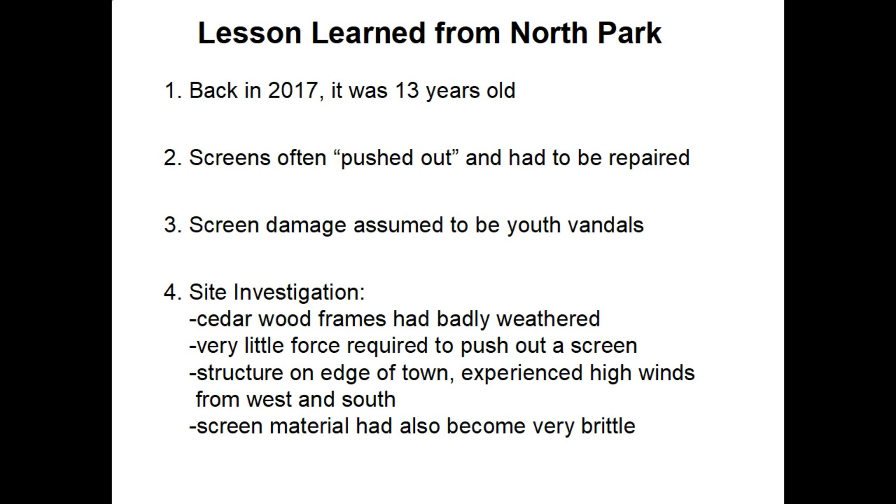When I did a thorough site investigation, though, I found the cedar wood frames were badly weathered and very little force was required to push them out. That structure is on the edge of town and experiences high winds from the west and the south. The screen material had also become very brittle.

On the existing North Park design, the frames were made out of cedar. Each of the openings were approximately 4 foot wide by 5 foot tall. The cedar was 1.25 inches wide and 7/8 thick. I found out that standard cedar thickness at the Menards store is 7/8, not 3/4 like pine.

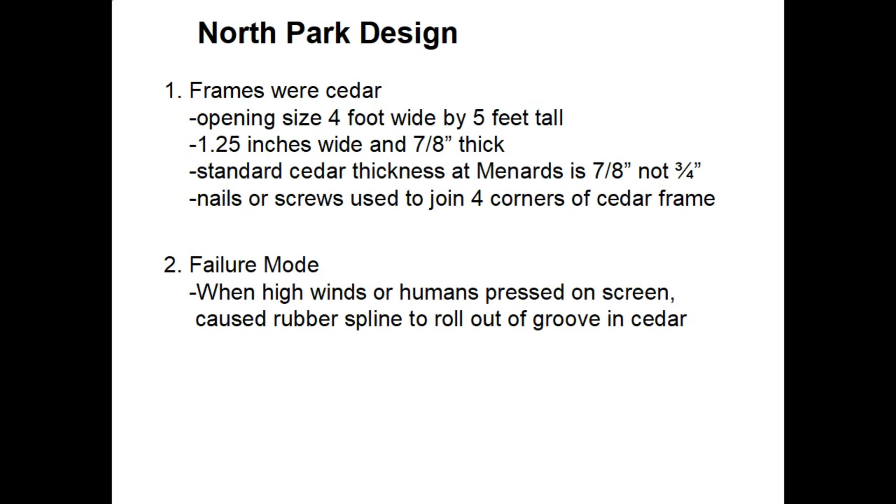Nails or screws were used to join the 4 corners of the cedar frames. The dominant failure mode: when high winds or humans pressed on the screen, it caused the rubber spline to roll out of the groove in the cedar.

I made a drawing of what the original North Park design looked like. You can see the stop piece that the screen frame is shoved against, and then the screen frame itself is the 1.25 by 7/8 piece that's held in with screws to the building, and the red is the screen material, and the round spline is shown in the center.

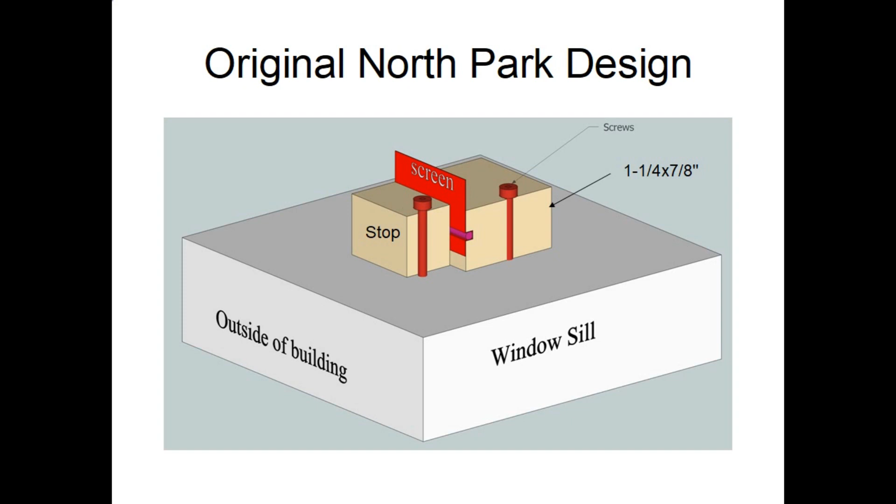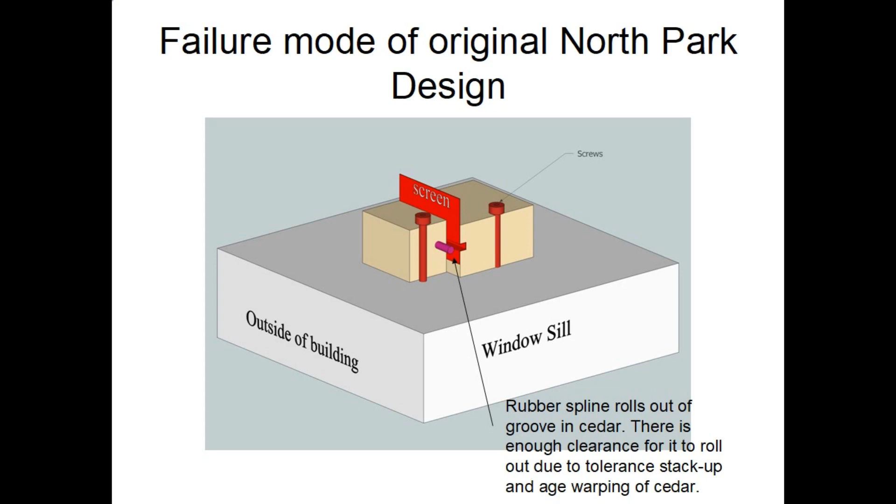This drawing shows the failure mode of the existing North Park design. What happens is the screen frame often gets warped or distorted from the effects of the weather, and then either the wind or people push on the screen, and the round rubber spline rolls out of the groove. There is enough clearance with the frame pieces moving around due to warpage for it to roll out, and then the screen flops in the breeze.

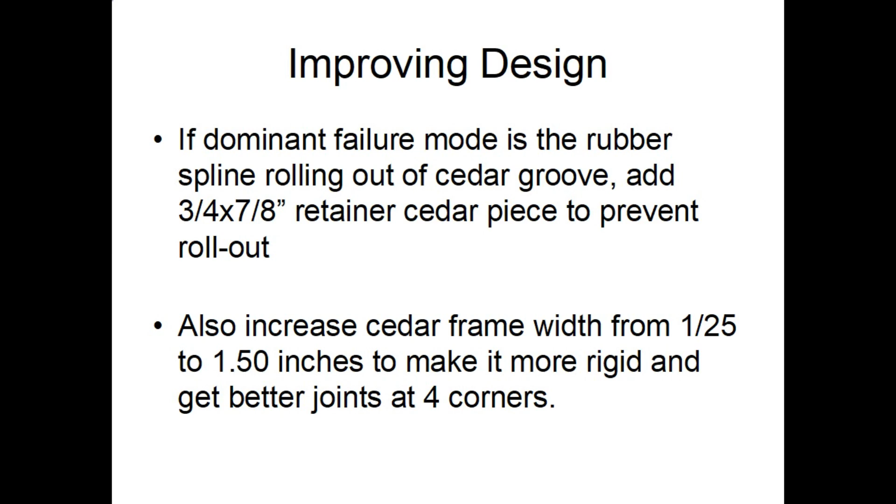Back in 2017, I searched the internet and I expected to find some design guidelines for how big the groove width and depth should be. I was really surprised there was nothing on the internet or any YouTube videos to help explain that. So it turns out the groove width and depth are a function of the screen material and the rubber spline diameter.

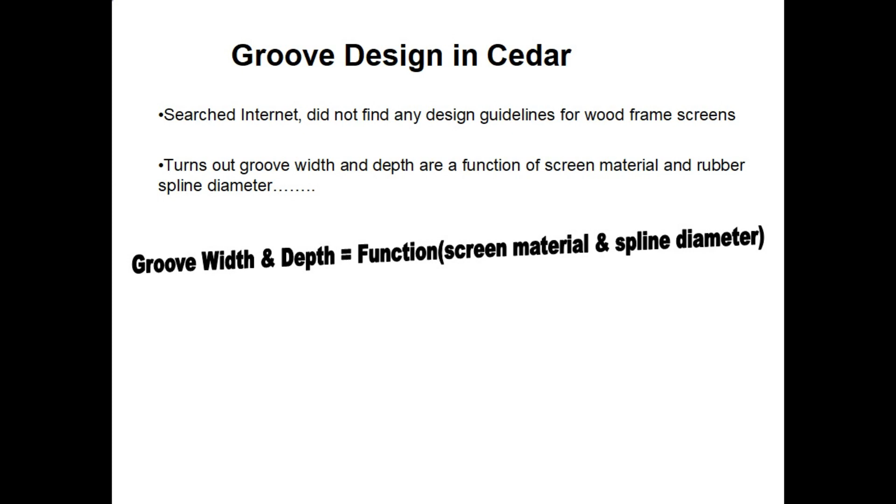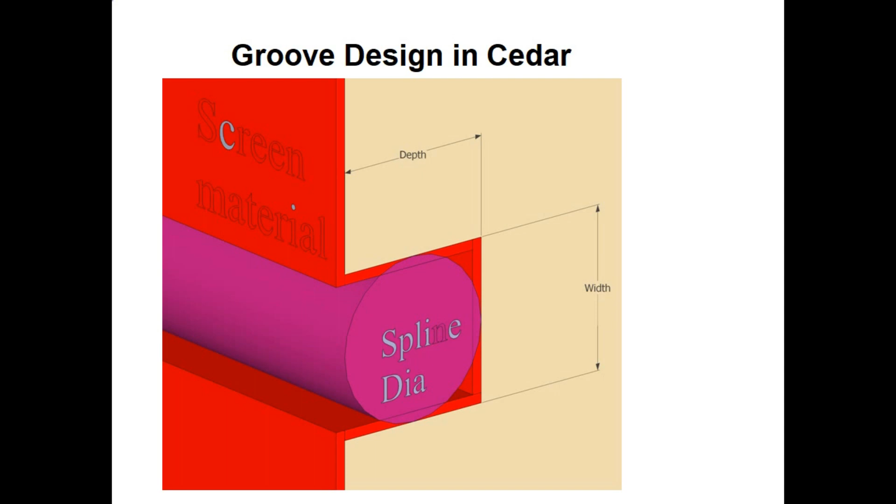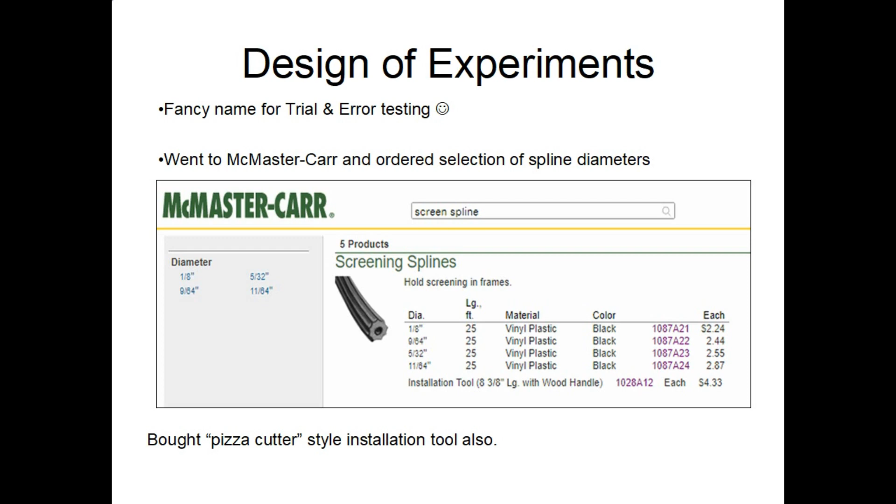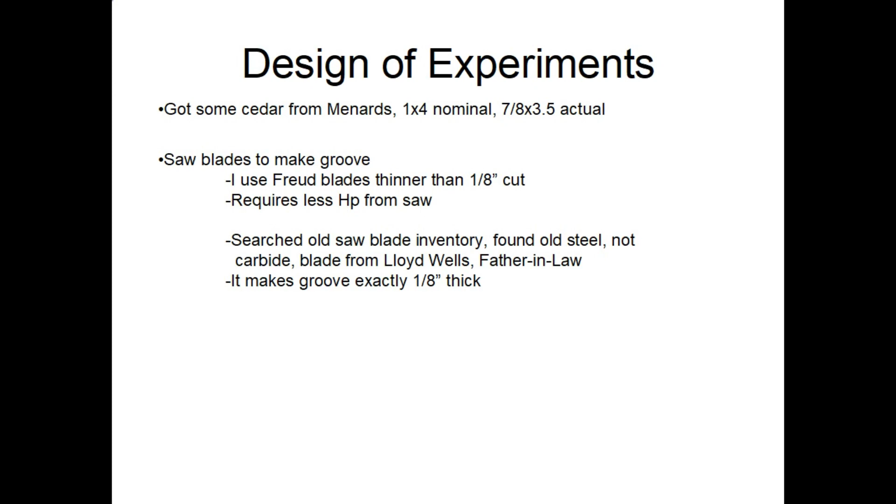I went to the Menards store in Bloomington and got a few pieces of cedar, 1 by 4 nominal size, 8 foot long. The actual measurement's 7/8 thick by 3.5 inches wide. My saw blades that I normally use are Freud's, and they're much thinner than an 1/8 inch cut, and I use those because it requires less horsepower from the saw. I searched my old saw blade inventory and found an old steel blade from my father-in-law, Lloyd Wells, and it cuts a groove exactly 1/8 of an inch thick.

To run the experiments, what I did was make little screens that were only roughly a foot by a foot and use those to experiment with. And then as I went along, I reviewed the different designs with the park maintenance superintendent.

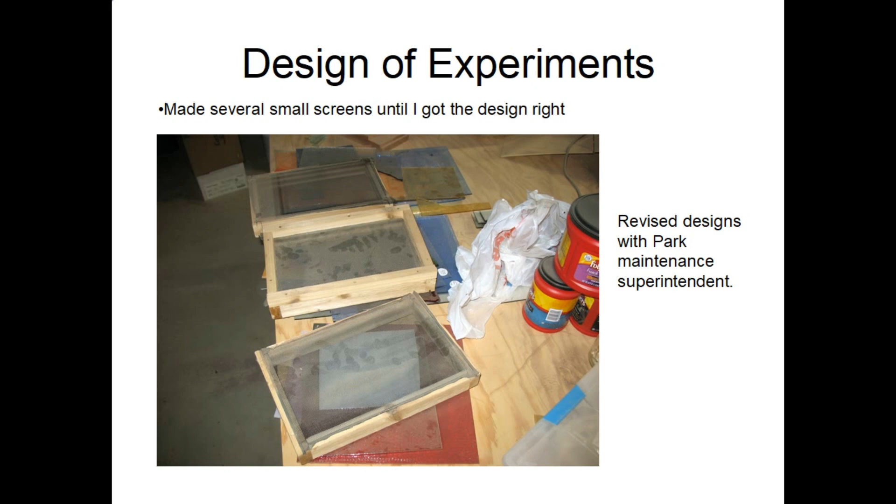This Excel table shows the results from my test work. I tried a blade thicker than an 1/8 and with an appropriate rubber piece, and it did not work. And I ended up using the old Sears saw blade, which worked the best.

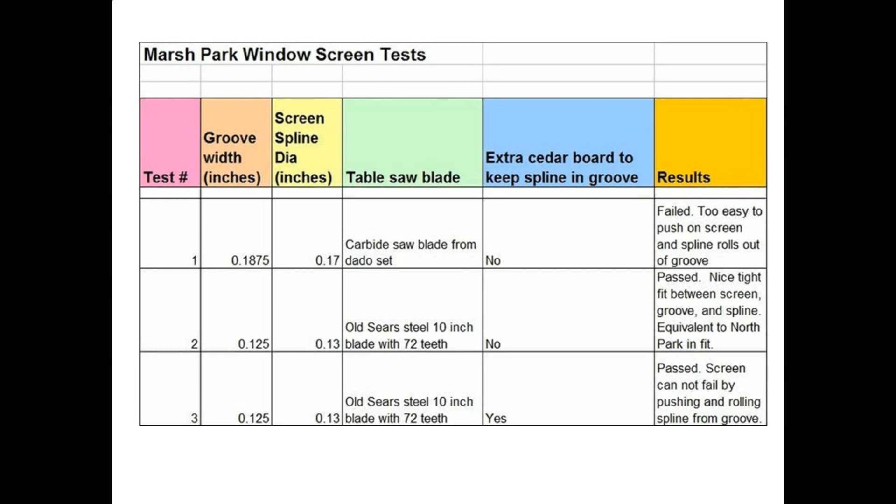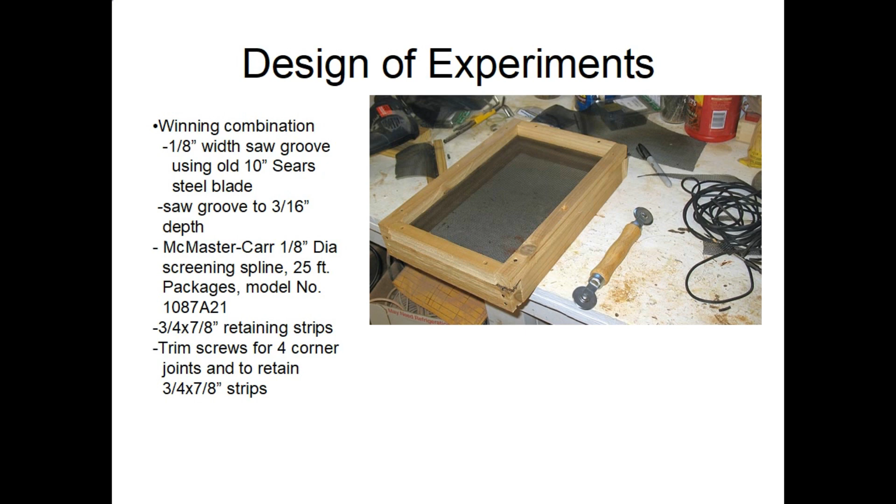So the winning combination was the old Sears saw blade that cut an 1/8 inch wide groove. I sawed the groove 3/16 deep. I used the McMaster-Carr 1/8 inch diameter screening spline, and I added the retaining strips, and I used some special trim screws to make the 4-corner joints. Here's a picture of those special trim screws that I got at my local lumber yard, and the old Lloyd Wells steel table saw blade that I used to cut the grooves.

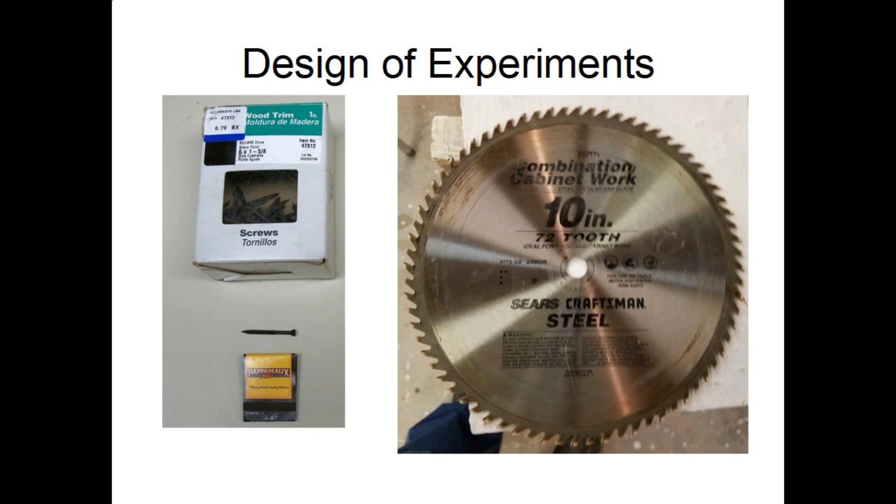The process I followed for making the 1.5 inch wide cedar frame pieces: I got the material from Menards, transported it home to my basement shop. I ripped those to 1.5 inch wide frame pieces. You'll get 2 of those 8-foot strips from each board, and I did use my Freud 10-inch blade to rip those because that old Sears saw blade was too dull to rip anymore.

Once I got them ripped, I needed to put the groove in, so I changed to the old Sears steel blade. I set the depth to 3/16 and set the fence at 7/16 to be on the center of the board. And then I ripped the groove. You have to feed very slow because of the knots. You need to do a quality check. If you didn't go full depth on the knot, you need to saw it again, and then transport the pieces to the front yard and stain them on sawhorses.

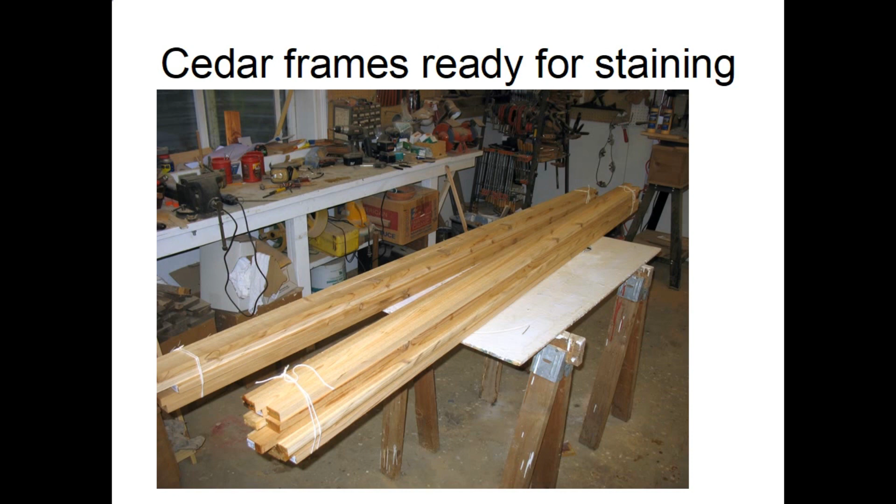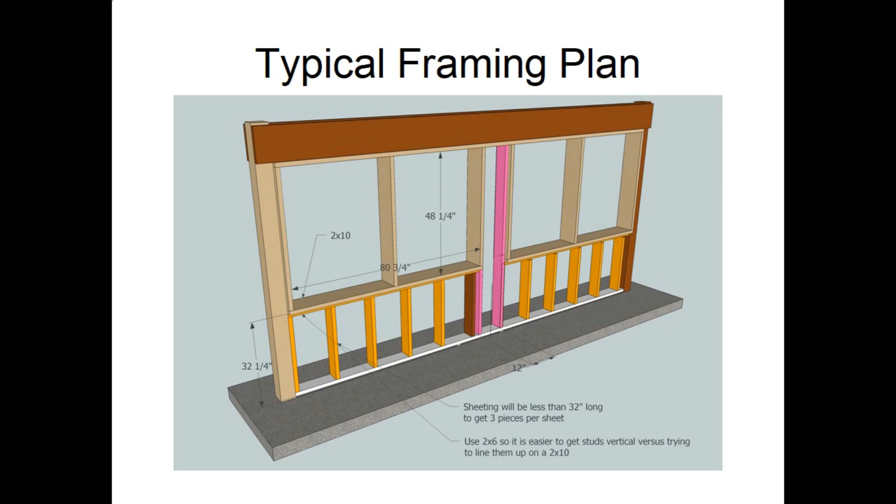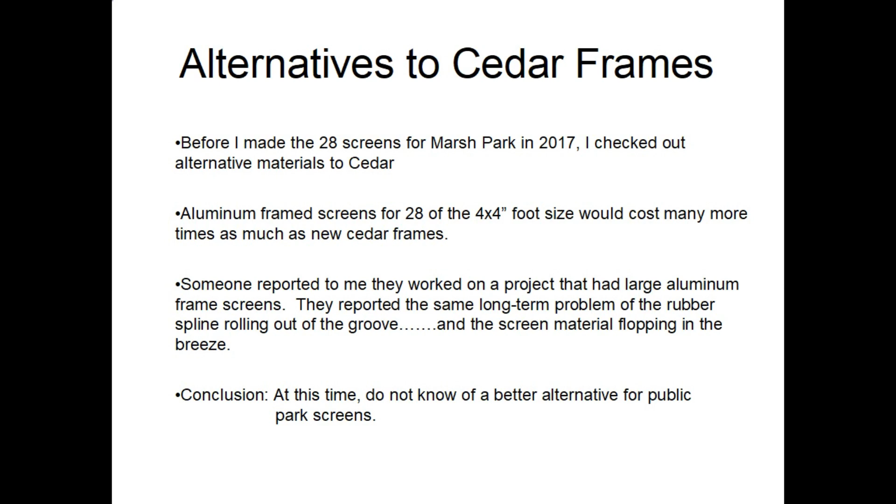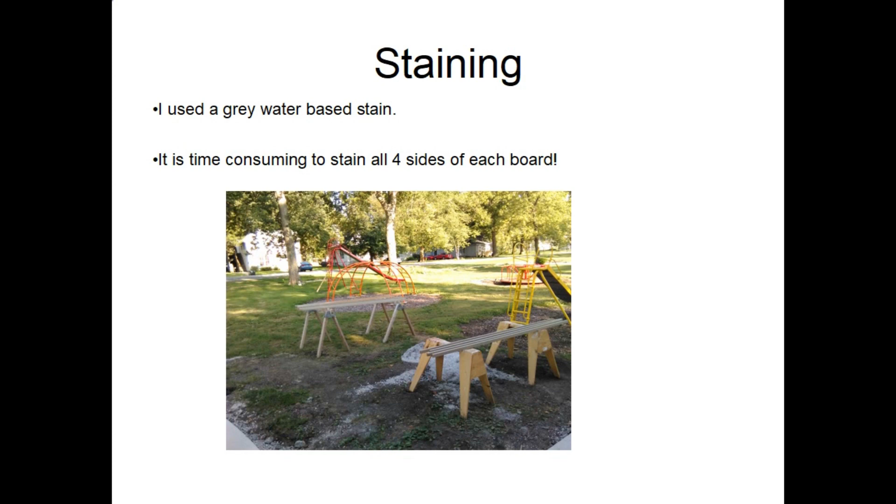I did investigate alternatives to using wood cedar frames, like using aluminum, but boy, that was really cost prohibitive. And then other people told me that they had worked on old buildings with aluminum frames and they still had the issue of the spline popping out of the groove. I used a water-based stain for all the pieces required to make the screens. It's really a labor-intensive process because you have to stain or paint all 4 sides of each wood board.

In many ways, trying to make cedar frames for screens is trying to make a silk purse out of a sow's ear. Why is that? It's because the cedar boards are full of knots. They're also warped. So as you go through the processes, try to make good decisions like selecting the best side to saw the groove into, select the straightest pieces when you're cutting out your frame lengths, and try to avoid using knots at the end of the frame boards because the screws won't go into knots.

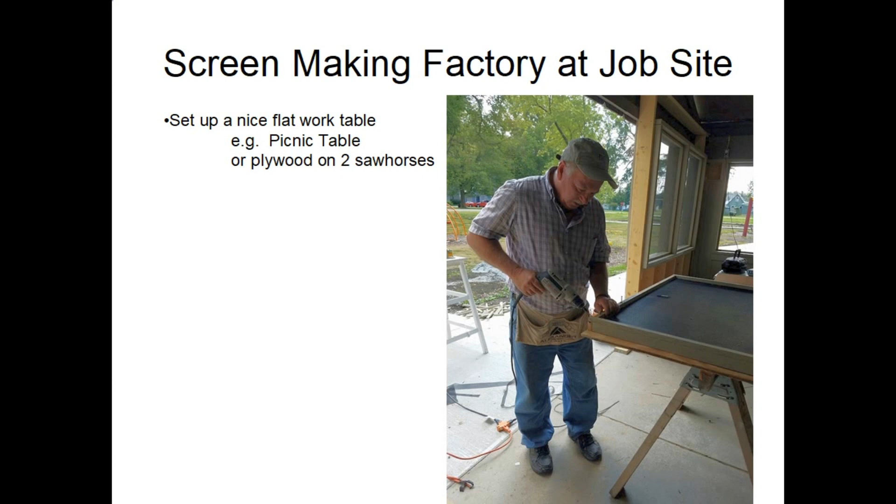Be sure and set yourself up a nice flat work table. You could use the top of a picnic table, or you could take a piece of plywood and set it up on 2 sawhorses like shown here. This picture shows all the tools that I use to make my screen frames, including the wooden handled pizza cutter, which is recommended for this job.

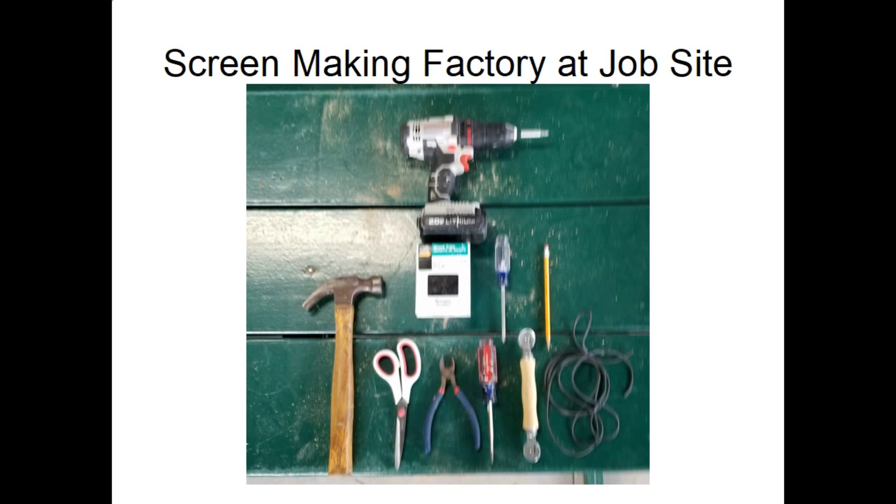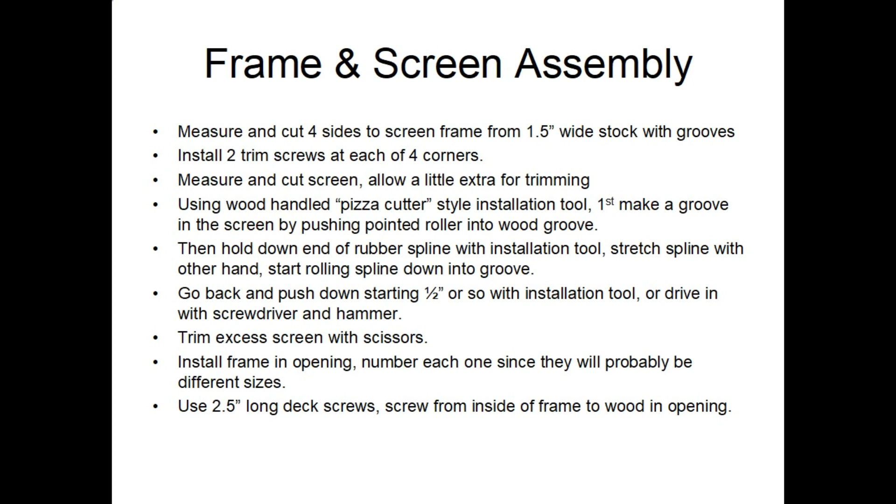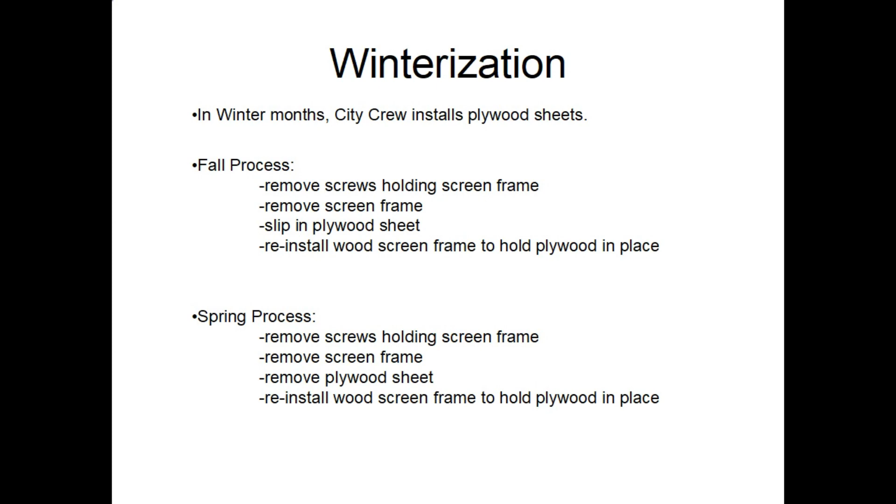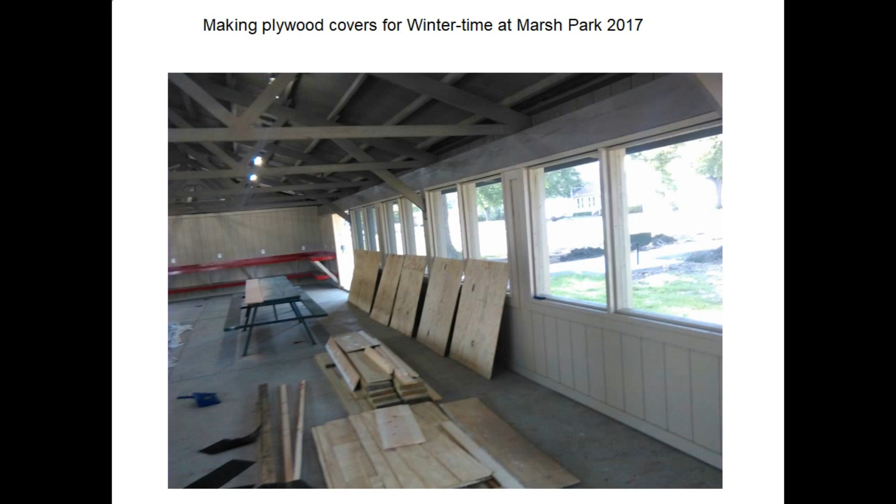In the winter months, the city crew comes out and installs plywood sheets between the cedar frame screens and the outer stop on the building. Then in the spring, when the weather gets warm, they remove the plywood so you have the screened in frames during the summer months. Here's a photo of back in 2017 when I was measuring and cutting and making the plywood panels that are used in the winter months at Marsh Park.